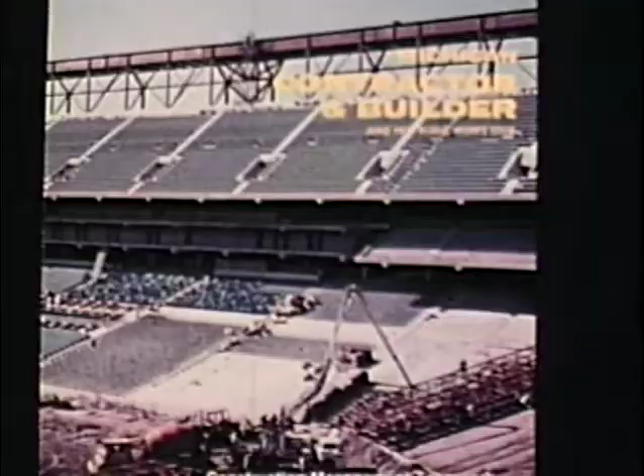Why this widespread interest? Well, all over the country, people had grown used to hearing stories about problems, delays, runaway inflation in stadium construction. For example, the New Orleans Superdome, which was initially supposed to cost $35 million, but wound up costing $168 million. For the Pontiac Silverdome, which has 10,000 more seats, the cost was $55.7 million. This figures out to $691 per seat. Construction time was just a day over 23 months.

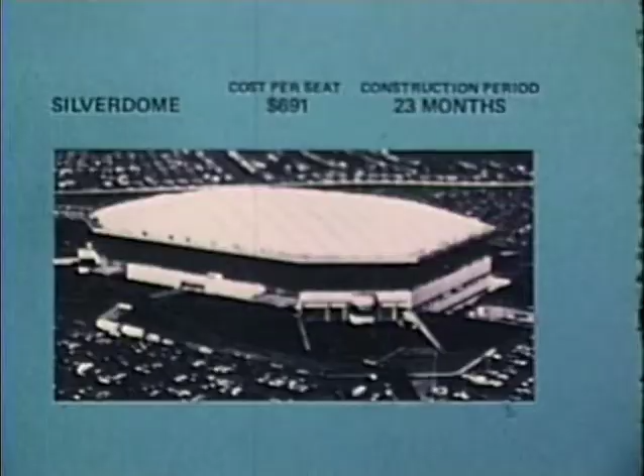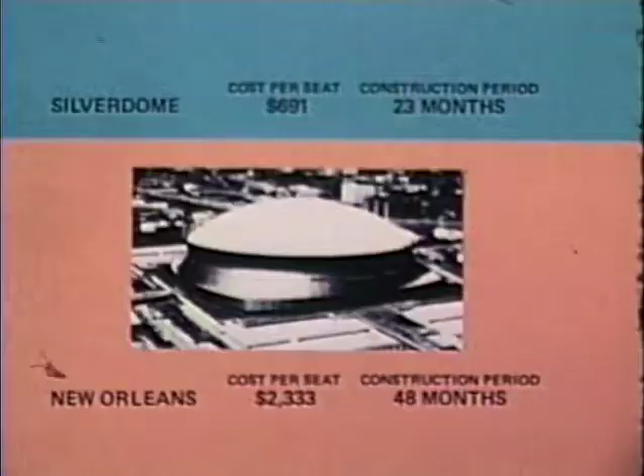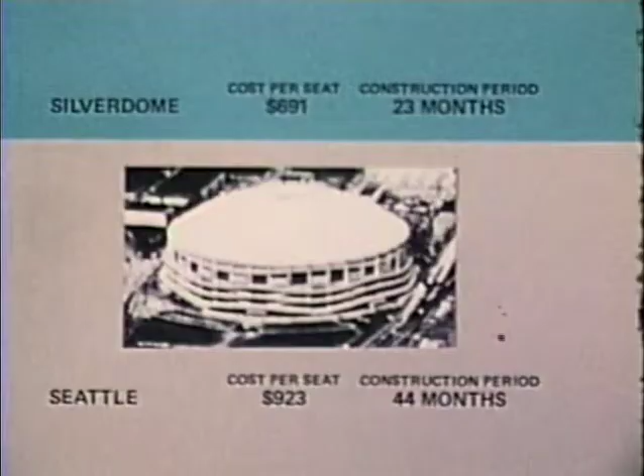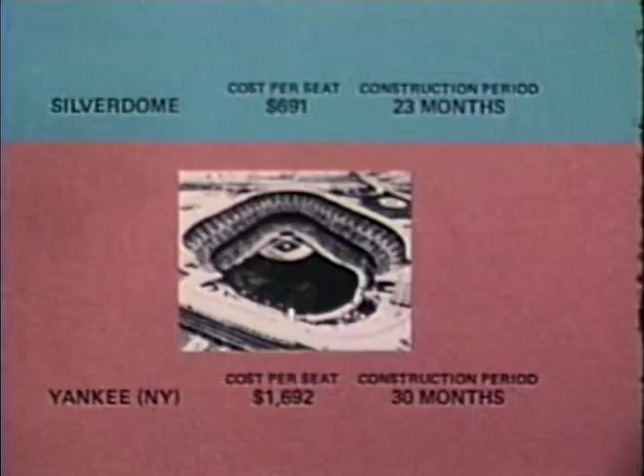In New Orleans, the per seat cost was $2,333. Construction time, 48 months. And here are comparative figures for other stadiums. The Kingdome in Seattle, cost per seat, $923. Construction time, 44 months. The remodeling and modernization of Yankee Stadium in New York. Per seat cost, $1,692. Construction time, 30 months. And the Olympic Stadium in Montreal, $7,902 per seat. Construction time, 51 months.

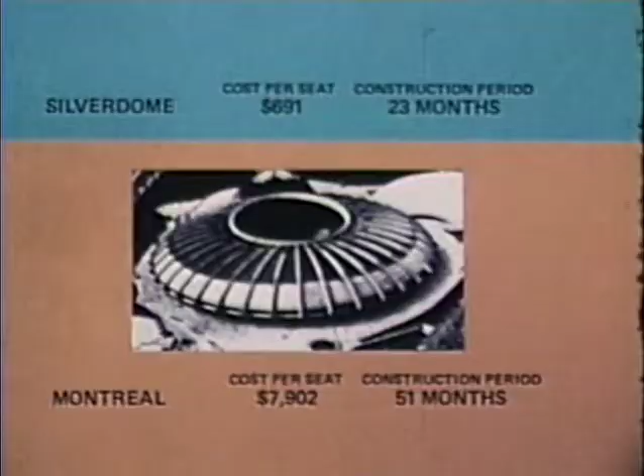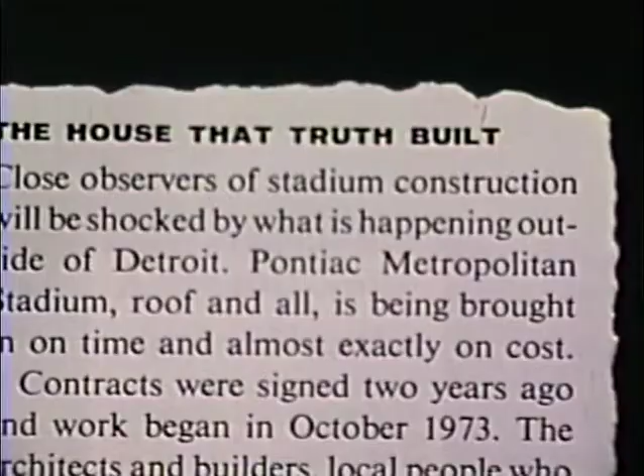The contrast was so great that the magazine Sports Illustrated commented, "Close observers of stadium construction will be shocked by what is happening outside Detroit. Pontiac Metropolitan Stadium, roof and all, is being brought in on time and almost exactly on cost." Comments like these were very gratifying to us at Barton Malow Company. It has been a truly challenging project.

One of the principal reasons we were able to remain on target was the fact that the stadium was built through the method known as construction management, rather than through conventional contracting methods. Under this method, the owner, the architect, and construction manager operate as a team. The construction manager is primarily responsible for cost estimates and cost control, review of design with a view towards value engineering, consultation on construction techniques, coordination of construction and scheduling, and direction of all construction activities.

Ground was broken September 19, 1973 by the mayor of Pontiac, the owner of the Detroit Lions, and the Pontiac Stadium Building Authority chairman. By this time, Barton Malow, as construction manager, had held many meetings with members of the authority, the architect, O'Dell, Hewlett, and Luckenbach. All material, labor, and equipment requirements were thoroughly analyzed. We reviewed the availability of materials and considered possible alternatives to complete the project at minimum cost in the least amount of time.

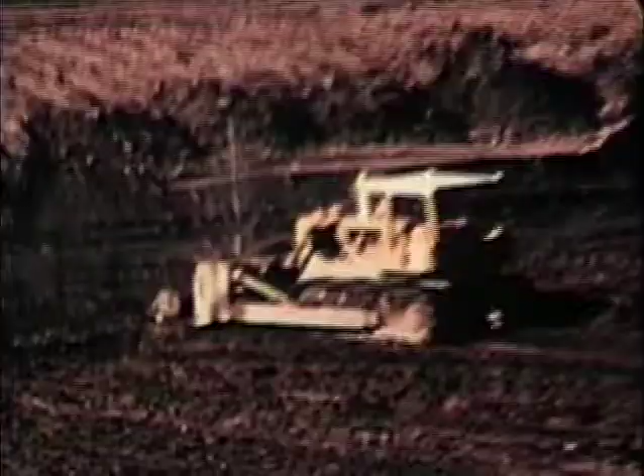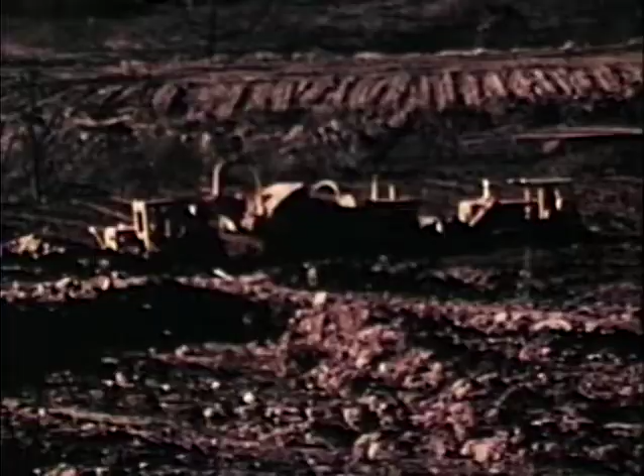The site of 132 acres included several swamps, which had to be drained, compacted, and filled. The grading and clearing required the services of the operating engineers, and they were idled by a labor dispute. It was mid-October when a settlement was reached and the work got underway. Mike Makuta, architect's representative, and Barton Malow Vice President Bill Dryberg, who served as the project manager, recall the problems.

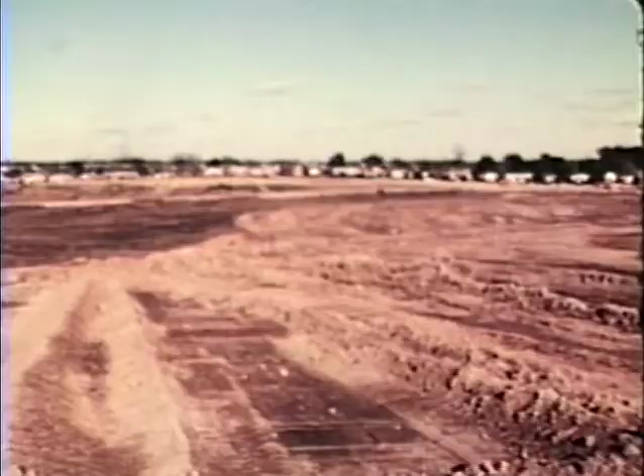Right here behind us, a typical type of terrain that we started in the first stages where we had to cut and fill. Yeah, well, it was like this. Just like this. And worse in some areas. We had 4 swamps to contend with, which we drained and surcharged and allowed to settle for a period of some 12 months. Land balancing involved 1,350,000 cubic yards. Despite the late start, 2/3 of the site preparation was complete by the end of the year.

The original design had called for spread footings to support all columns. In view of the delay and the onset of winter, this would have thrown the project behind schedule. Here is an instance of the flexibility made possible by the use of the construction management method. A very detailed study was made with the structural engineers. As a result, we switched from spread footings to caissons.

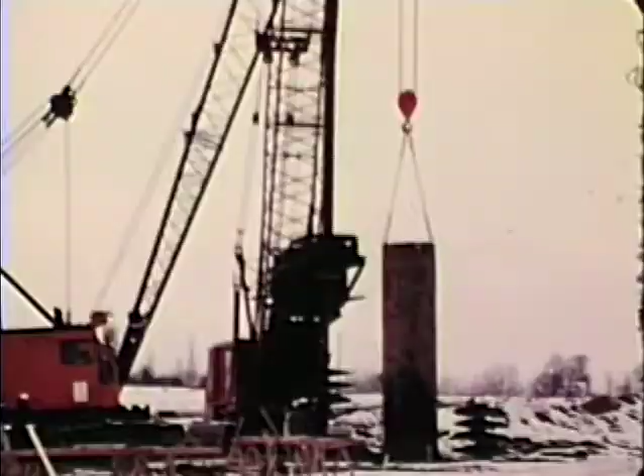We placed 236 of them, from 4 feet to 7.5 feet in diameter, at depths to 80 feet. Shell liners prevented the sides from collapsing in the augered holes. The caissons enabled us to avoid open-cut excavation, forming and backfilling, allowing construction with less concern for winter conditions.

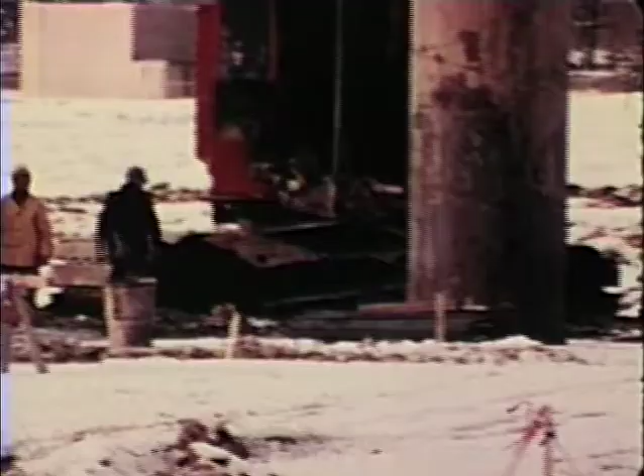Meanwhile, another serious problem had arisen. Here again, the construction management method facilitated a solution. The original stadium structure had been designed in structural steel. During the late summer of 1973, steel costs began to soar. This could have meant at least a $250,000 price increase.

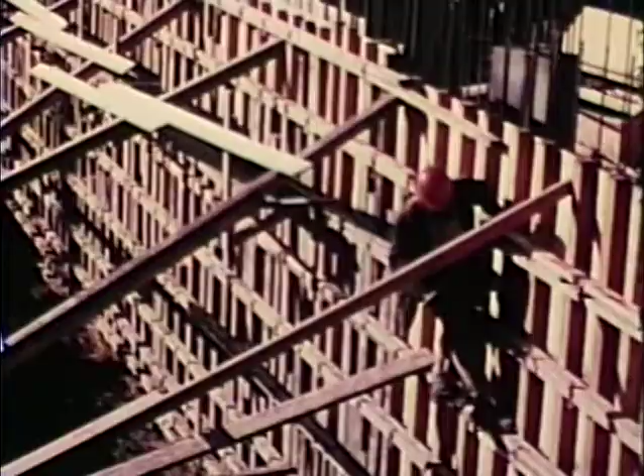A study was quickly launched to see whether or not we could avoid this additional cost by totally redesigning the structure in concrete. It was found by so doing that we could save the $250,000 and also improve the construction schedule. The design changes were made during the winter of 1973 and the early spring of 1974 without interrupting the building schedule. It was another dramatic demonstration of the advantages of the construction management method.

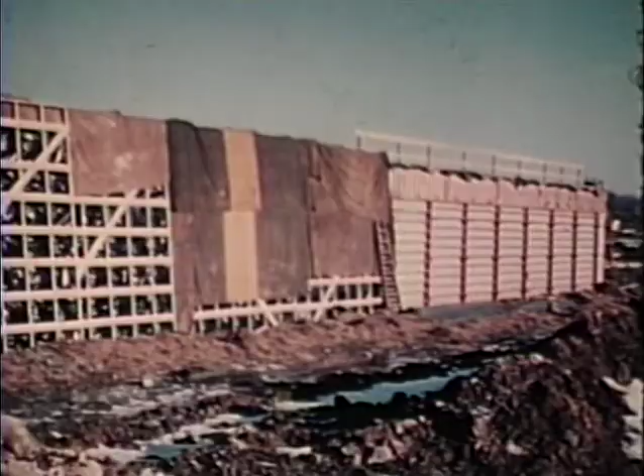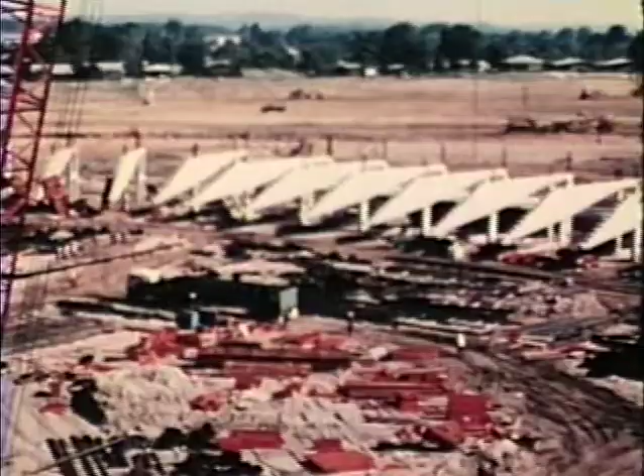By late December of 1973, the pouring of wall footings, walls, and columns was underway. Care was taken to protect them against cold weather. In addition to serving as construction manager, the Barton Malow Company, as general contractor, was awarded the contract for all the concrete work through competitive bidding. As soon as the preliminary work was sufficiently advanced, they proceeded with the lower girders. By June of 1974, they had progressed to the upper girders.

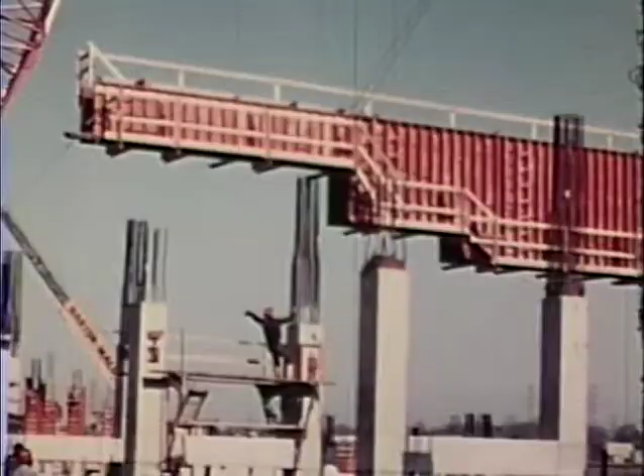All of the girders were poured in place by means of a special self-supporting forming system developed under the direction of Barton Malow Senior Vice President Floyd Wieland, who is seen here discussing the system with Ben Maybach III, Executive Vice President. Here is a lower girder form being set into place.

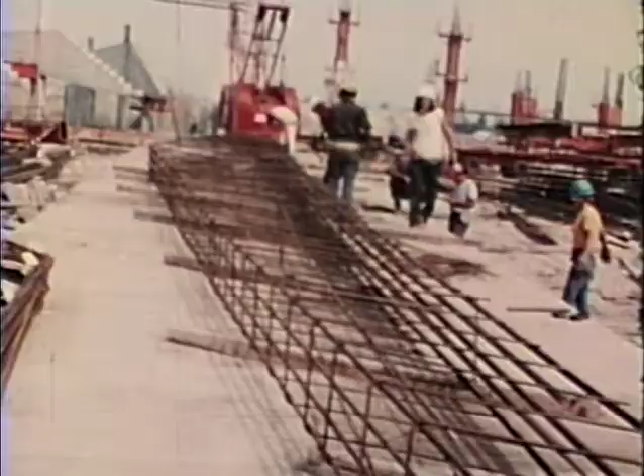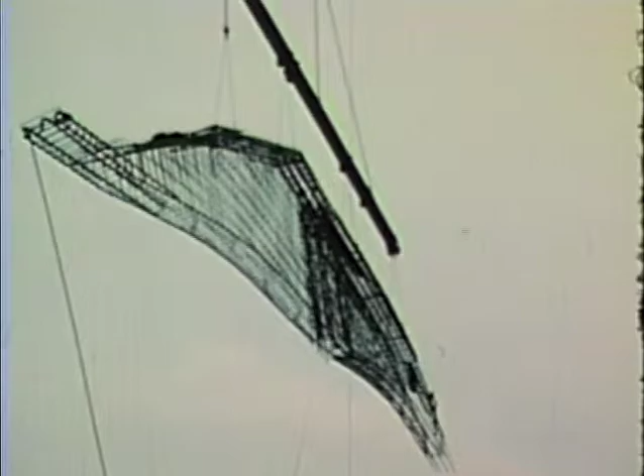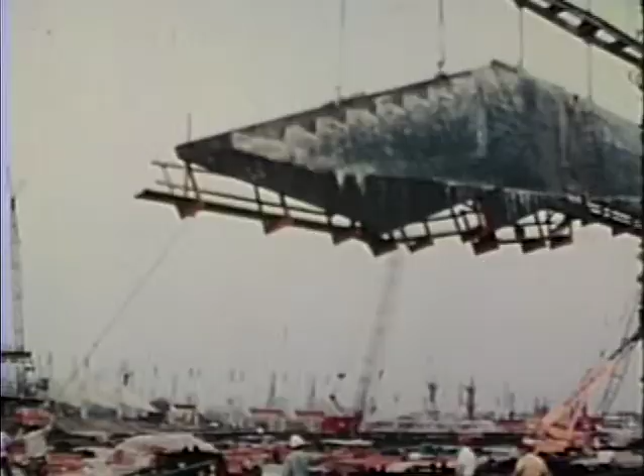Cages of steel reinforcing were assembled, then dropped into the forms. The component form and reinforcing steel weighed 55,000 pounds. Each form was used for 16 pours. There were 3 of the lower type and 4 of the upper. Here we see a lower girder form being removed.

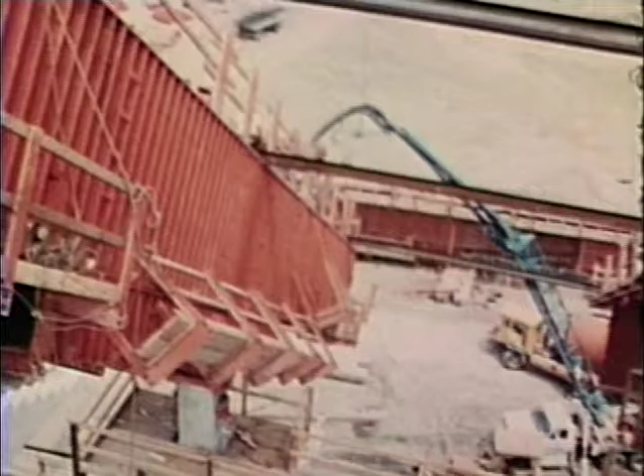Much of the concrete placement was done by pumps, supplied by the Cloverdale Rental Company, a firm closely related to Barton Malow. The use of concrete pumps is rising rapidly. Recent technology has made them capable of operating at almost any height and under most weather conditions. Here, a pump hose is being placed. Of course, not all the concrete was placed by pump. This is an example of concrete placement using the conventional bucket method.

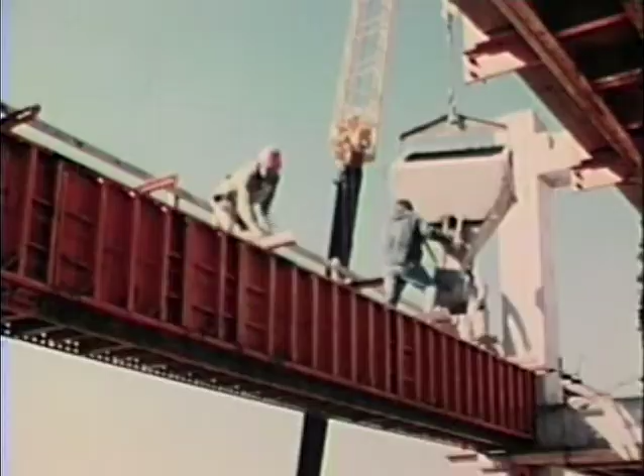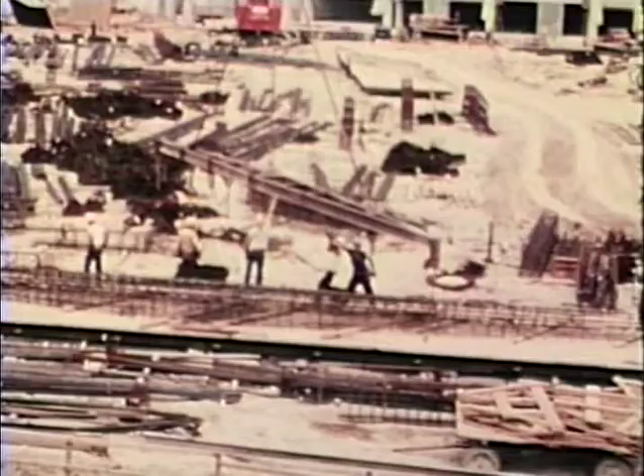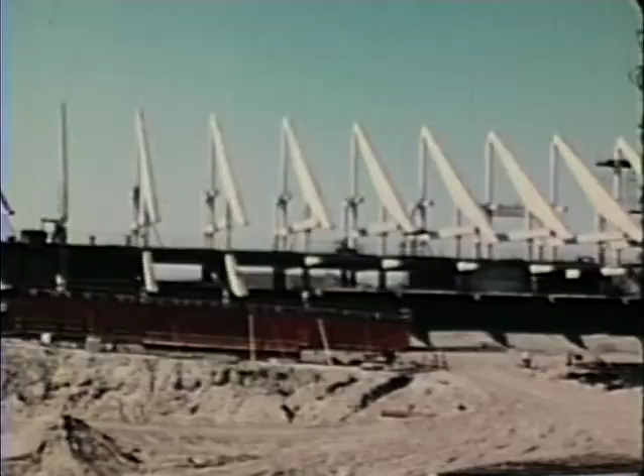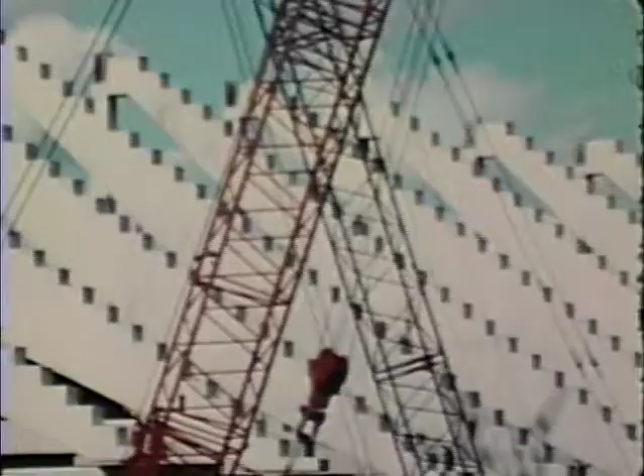The playing field was to be excavated 40 feet below the field level concourse and 50 feet below the parking lot. It was held at 15 feet below the concourse, however, while the concrete work was in progress. This allowed a working platform for the 200-ton crane needed for the handling of the girder forms, and it also provided a logistic storage area for forms and reinforcing steel. With the pouring of more girders, the stadium gradually took shape. 1 year to the day after groundbreaking, it looked like this, representing 11 months of actual construction.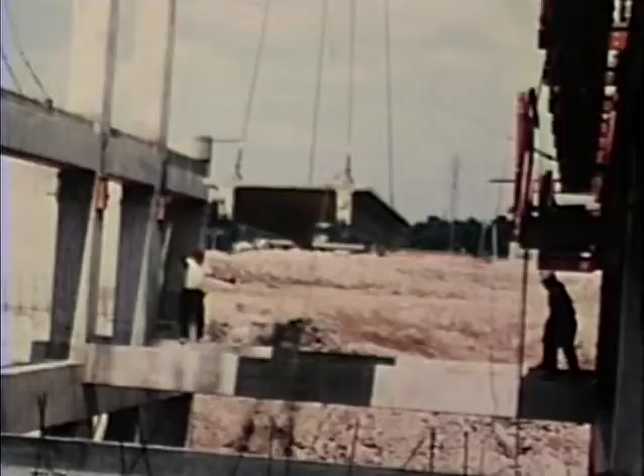As sections of the concrete framing system were completed, installation of precast units was begun. These included 10-foot wide twin T's, 28 feet long. The majority of the stadia sections, each comprising 3 tread and riser units, were erected during the fall and winter months.

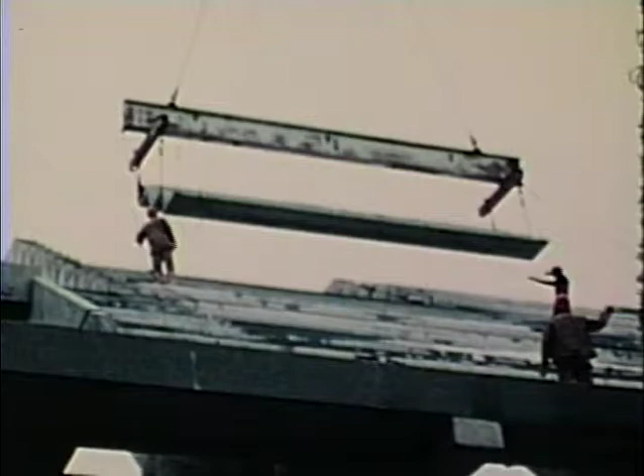Here we encountered another major problem. Right in the middle of the project, the firm manufacturing the precast units ran into financial troubles. This was in the fall of 1974. The firm was put under federal court control. We then arranged to operate the plant for the court-appointed receiver and were able to produce the needed units.

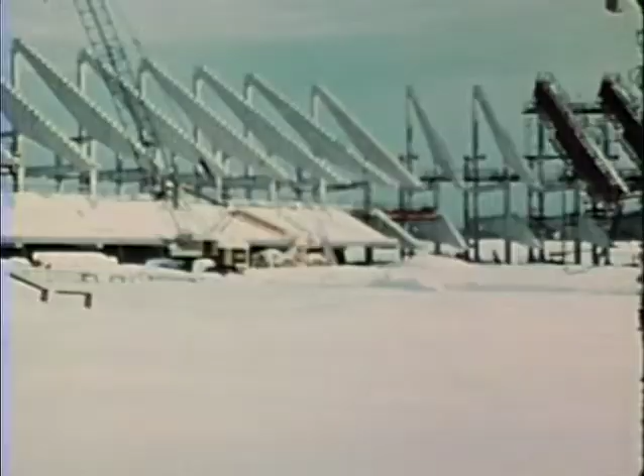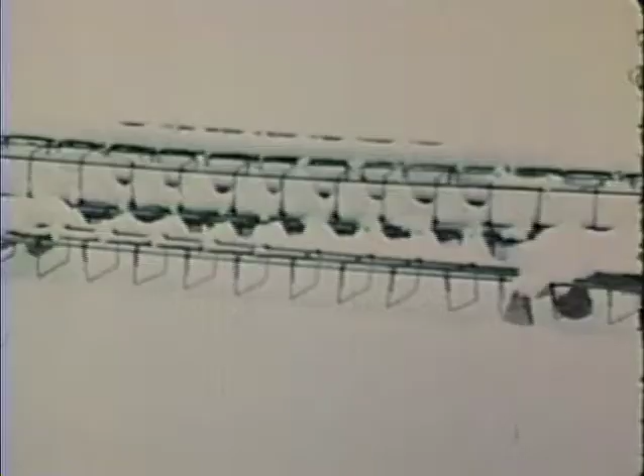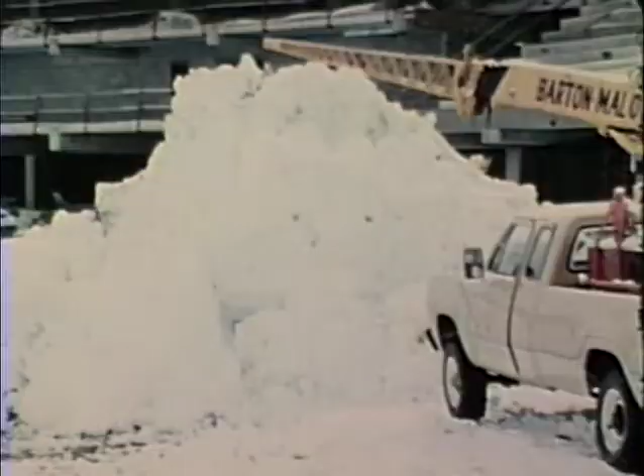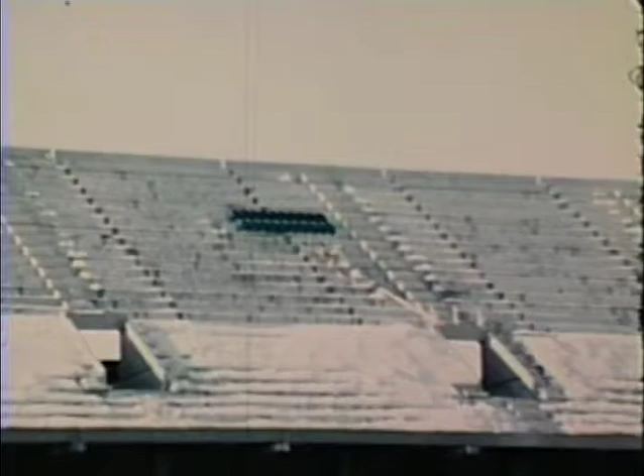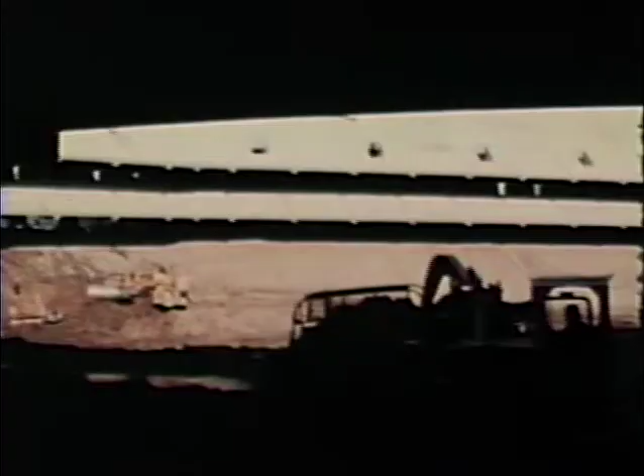With a major portion of the structural concrete and precast work completed, the next step was to excavate the bowl down to the playing field. The excavated earth, some 250,000 cubic yards of it, was used to build berms adjacent to the stadium and to provide inclined ramps up to the club and upper-level seating areas. This is the world's largest dome stadium.

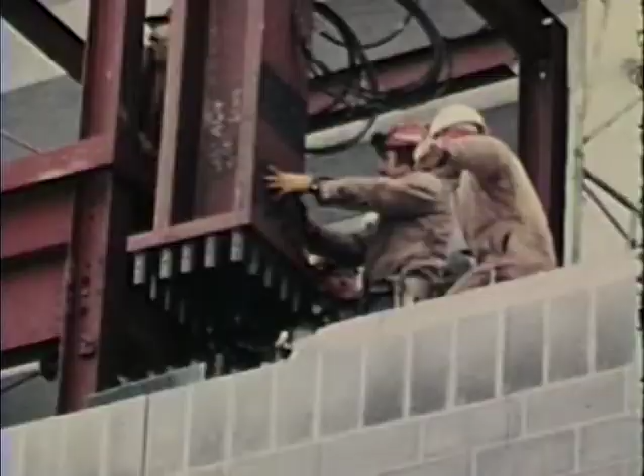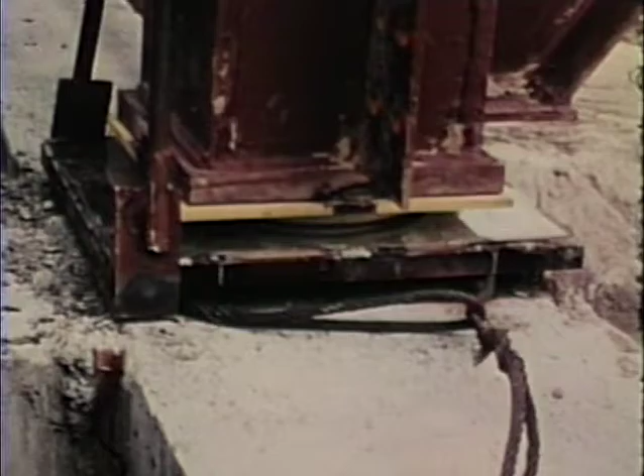In late February of 1975, erection of structural steel got underway for the compression ring, which supports the unique fiberglass fabric roof. The steel was all in place by May 15th, a total of some 1,800 tons. The floating ring, half cantilevered over the outer row of columns, has no expansion or contraction joints. All of the interior columns rest on Teflon wafers to allow movement up to 6 inches in a horizontal plane.

There are 6-foot deep web members on each side of the ring, which has an 11-inch concrete slab cast on a fiber plank permanent form system, with an 18-inch concrete wall on each side. The ring is 23 feet wide and encircles the structure for a length of 2,300 feet. It is 32 feet above the upper row of seats and 105 feet above the parking lot.

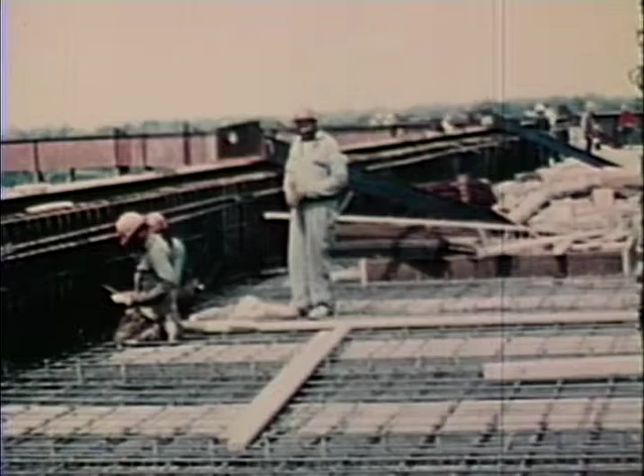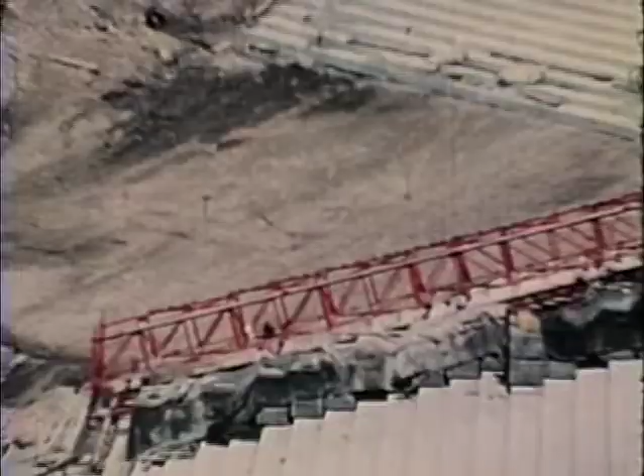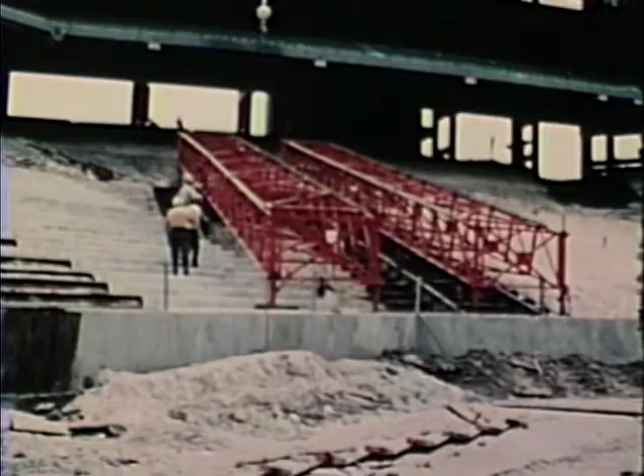Meanwhile, from March through June of 1975, we proceeded with the lower seating sections of the stadium. These sections were poured on grade, and for this purpose we developed a special form system which not only set the grade and the elevation, but also provided the form for each riser for the lower seating section. Insulated metal siding was used for the exterior closure to ensure maintenance of air pressure to support the roof. This had to be completed by September 25th in order to meet our October 2nd date for inflation.

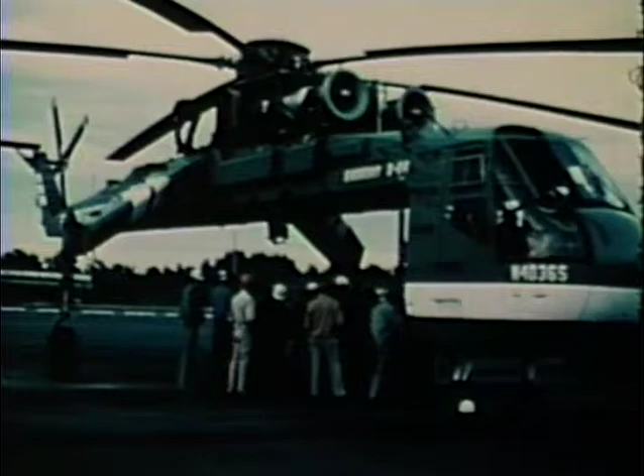The roof is supported on steel cables. It would have taken 3 weeks to string them in the conventional manner. We needed a faster way. Ben Maibach III and architect Carl Luckenbach joined me at the site as we brought in the largest helicopter available, an S-64 Sikorsky with an FAA rating of 20,000 pounds of lifting capacity. The cables are of galvanized steel, 3 inches in diameter. They range from 550 to 750 feet in length and weigh up to 16,000 pounds each.

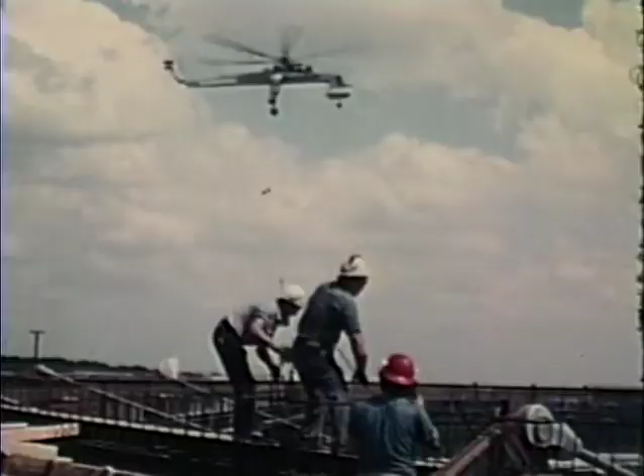The big helicopter picked them up from the parking lot, carried them over to the stadium, and lowered them into place. High winds hampered the operation at first. We immediately closed it down because safety is always our #1 consideration. We brought into service a second power winch so that both cable ends were under constant restraint. The cables are secured by open strand sockets at each end to the tiebacks on the compression ring. Each clevis weighs 300 pounds. The pins each weigh 96 pounds.

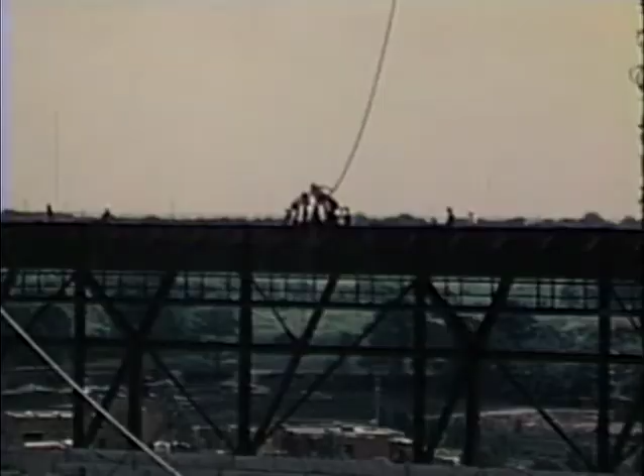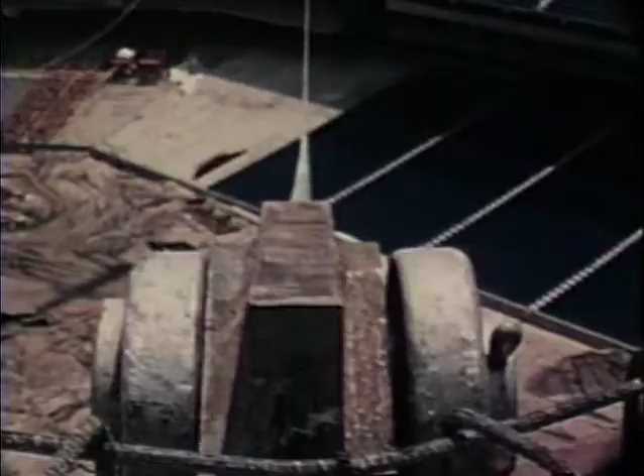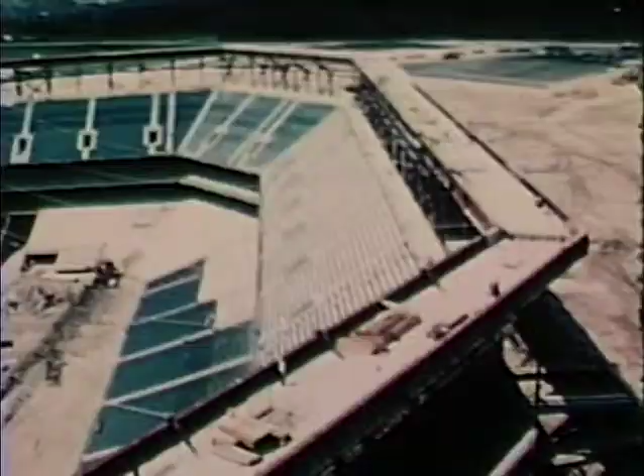The total length of the cables is about 2 1/3 miles, and they weigh 125 tons. The whole mix of cables and fabric weighs 200 tons. A conventional roofing system of equal size would weigh 30 times as much, or about 6,000 tons. The entire job of placing the cables was completed in one weekend, a total of 11 hours flying time on June 14th and 15th, 1975.

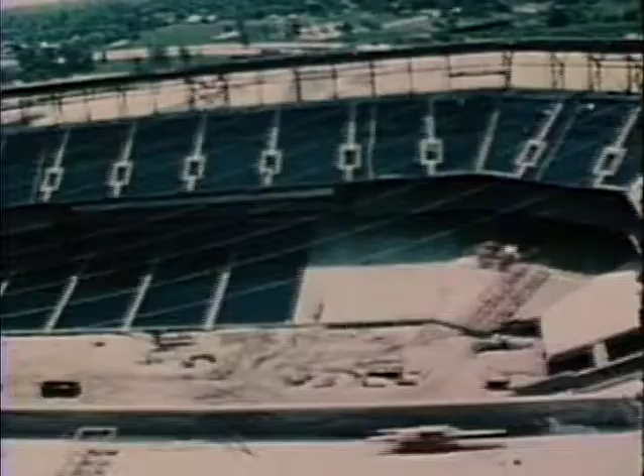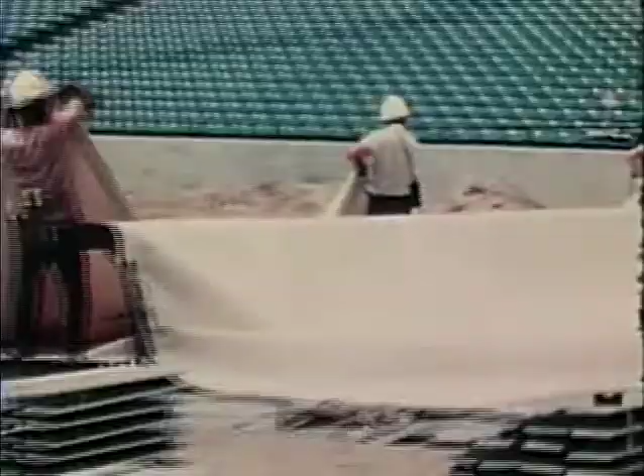The installation of the roof fabric was carried on from July 1 through October 1, 1975, as the contractor strove to meet an inflation date of October 2nd, 9 months ahead of contract schedule. The fabric is 1/32 inch thick Teflon-coated fiberglass. Initially tan in color, it gradually bleaches to a gleaming translucent white. Its area is about 400,000 square feet, nearly 10 acres. The 100 panels were installed in the air, working from suspended work platforms, using a crane and 4 A-frame towers to pick up and roll out the fabric panels.

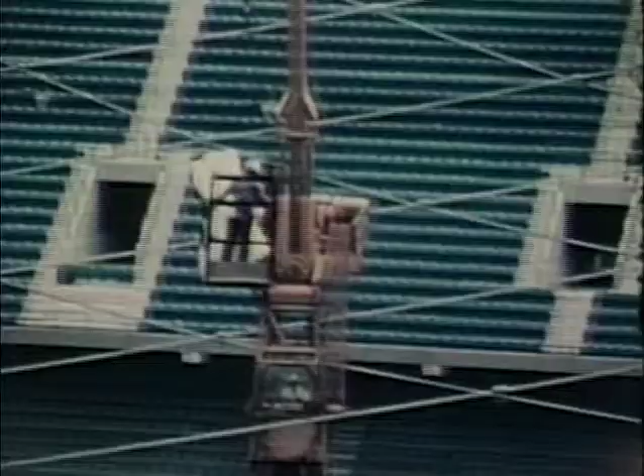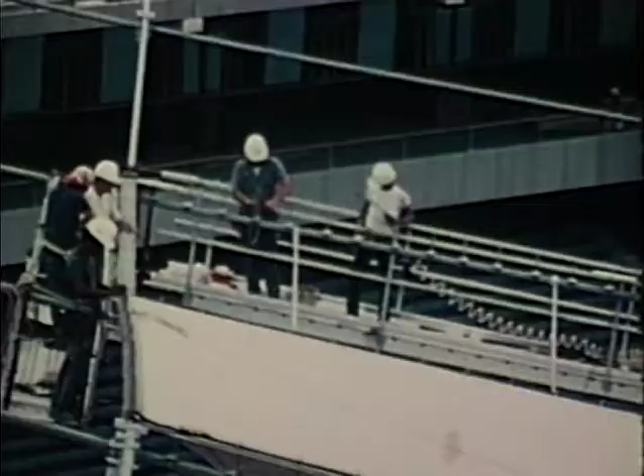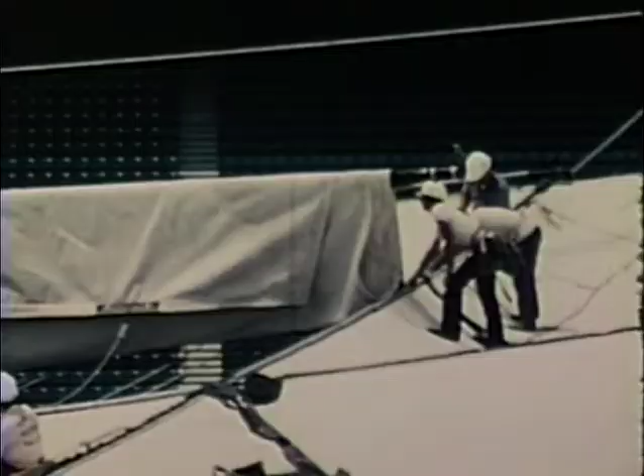The roof weighs slightly less than 1 pound per square foot and is air supported at 3 to 5 pounds per square foot. In maximum snow load conditions, it may take 12 pounds per square foot to support it. The surface of the roof panels is extremely smooth due to the Teflon coating. This gives the material a self-cleaning action with every rain. Under tension, the fiberglass yarn is pound for pound stronger than steel and less expensive. It also resists burning, shrinking, rotting, or mildewing. Estimates of how long the roof will last range from 25 to 50 years.

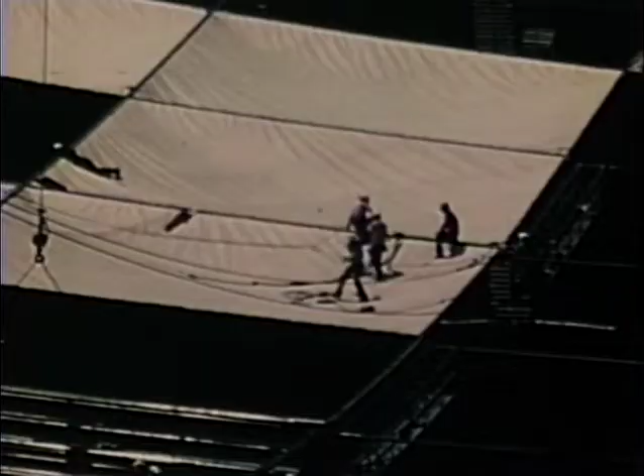This system has been used to cover other structures, notably the U.S. Pavilion at the 1970 World's Fair in Osaka, Japan, but never on so large a scale as the Silverdome. Wide use of the system is expected in the future for many types of structures. The supporting pressure is applied by 25 blowers, each powered with a 75 horsepower motor mounted on the roof ring. These also were lifted into place by helicopter.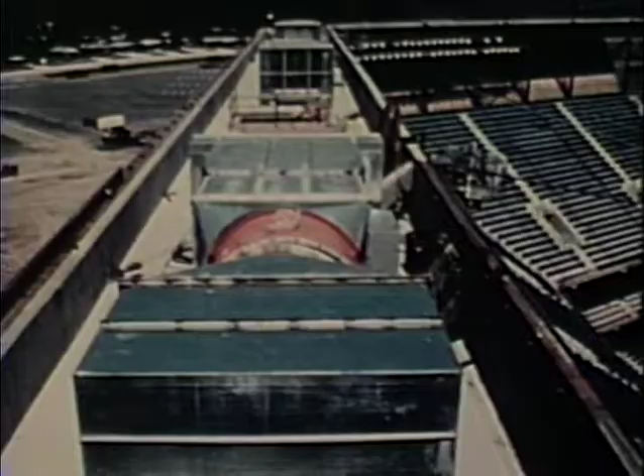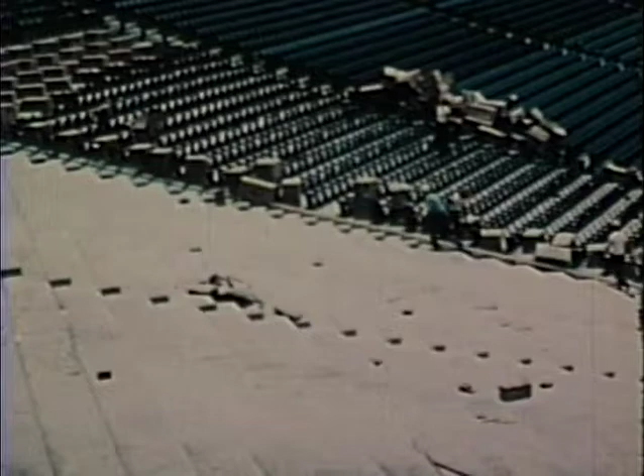Heat is provided by 10 of the blowers and 4 indirect gas-fired units. The number in use at any one time depends on the outside temperature, wind and snow conditions, and the kind of event scheduled. When the stadium is not in use, 4 or 5 of the blowers are enough to keep the roof inflated. While the roof work was proceeding, so was the installation of the seats. The schedule called for 10,000 a month, but the installers managed to reach a rate of 16,000 a month.

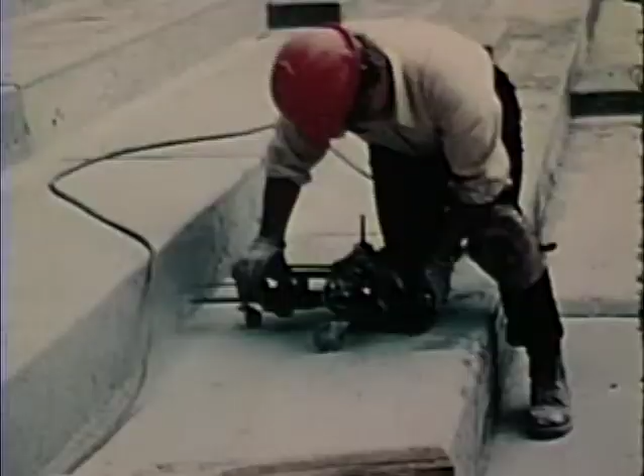The 80,600 theater-type seats provide much more space per spectator than the old-style benches. If bench seating had been used, as at the University of Michigan Stadium and the Rose Bowl, the Silverdome would seat in excess of 120,000. Installation of the seats required the drilling of holes for about 175,000 anchor bolts.

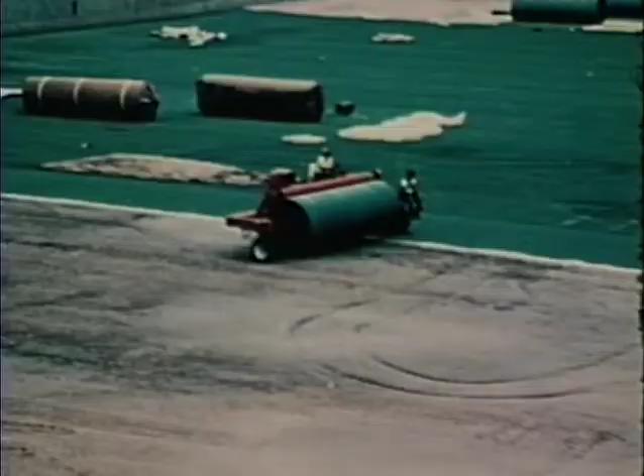With the first preseason football game scheduled for August 23rd, it was now time to install the AstroTurf to cover the playing field. A special machine was used to handle and lay each roll. There are a total of 28 rolls, each 15 feet wide by 234 feet long and weighing 3,600 pounds. A continuous nylon zipper joins the rolls together to form a total covering.

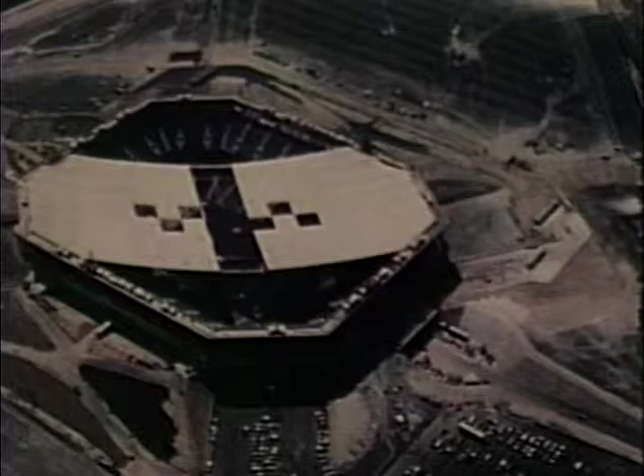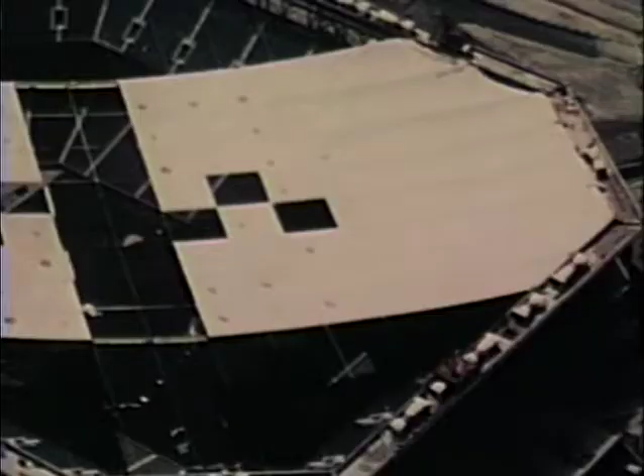Because of the early completion of the stadium, the Lions were able to schedule a preseason game as early as August 23rd. Heavy rains delayed the building cleanup and asphalt paving of the parking lot. With the roof only partially installed, the playing field got so wet it could not be striped. We brought in a couple of helicopters to fan it dry. The stadium was ready for its first football crowd.

Fans streamed through the gates, gasped in admiration of the stadium, enjoyed the pregame entertainment, and cheered the Lions. To make it a perfect afternoon, the Lions won the ball game.

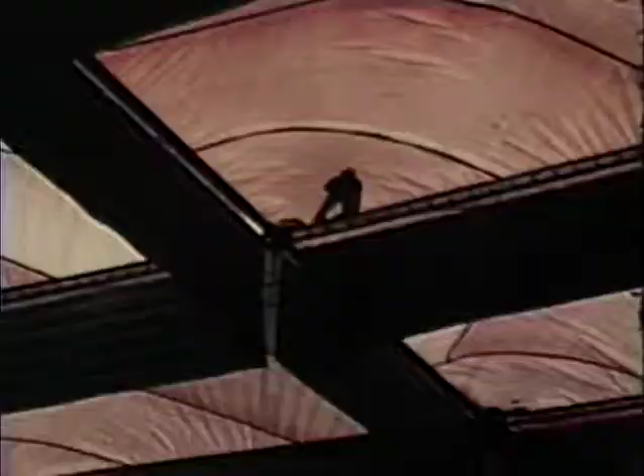On October 2nd, the stadium got its finishing touch. The big roof was inflated. It was a gala occasion as hundreds of guests, including VIPs from all over the world, gathered to watch the climactic event. There had been more heavy rains. The roof fabric held a number of large pockets of water. The crowd watched in suspense. Would the blowers be able to generate enough pressure to lift the dome?

The suspense didn't last very long. Excess water was pumped out and the big top inched upward. As it made its final surge, the crowd burst into a rousing cheer.

The stadium, including its private boxes, spacious press facilities, and 112 acres of paved parking, was now ready, not only for football, but for an infinite future of stirring athletic, entertainment, and cultural events, such as the record-breaking Revival Crusade conducted by evangelist Billy Graham, which had a total attendance of 365,000 people, including 70,000 at a single service.

And record crowds also for popular entertainers such as Elvis Presley. The Silverdome also provides an unmatched facility for community events, such as a gigantic Scout-tacular, at which boys and girls demonstrated the skills and learning they've acquired through scouting.

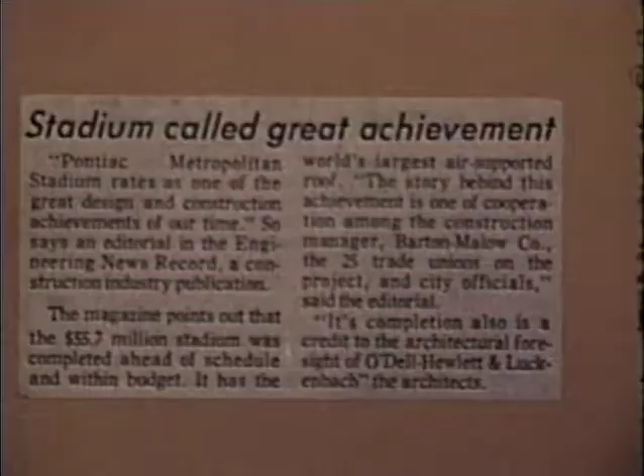For the citizens of Pontiac and the rest of the metropolitan area, the completion of the Silverdome was an occasion of great civic pride. For us at Barton Malow, also, it was a memorable moment. Building the stadium has been more than a job to us. It has been an adventure we will never forget.

Our original contract called for 800 days from start of construction to beneficial occupancy. The first game was played 670 days after construction began, 130 days ahead of contract schedule. The original contract for the roof installation called for the roof to be completed by June 30th, 1976. It was in place and inflated 9 months earlier than that, October 2nd, 1975.

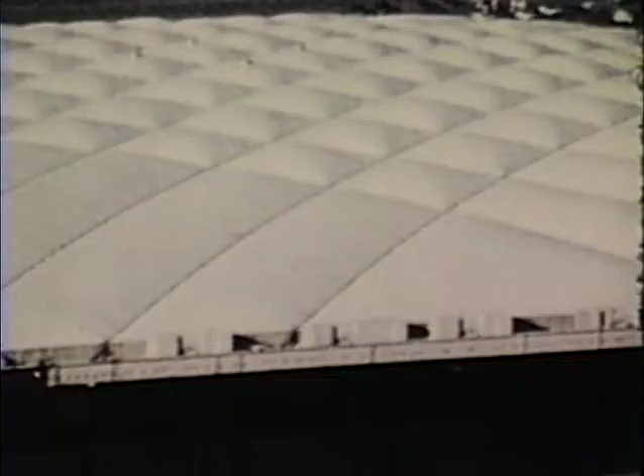The overall compression of the construction schedule reflected substantial dollar savings for the project, since all of the work was able to be performed within the framework of existing labor contracts. A total of 2,536 union construction tradesmen, representing 17 different trades under the leadership of the Greater Detroit Building Trades Council, completed the entire project without any work interruptions.

Cooperation of the owner and the architect engineers had been exceptional. We feel it has been the best test yet of the construction management method. In my 20 years of experience as an architect, I have to say that this has been the most gratifying and probably one of the best team efforts ever achieving a structure of this kind and of this magnitude.

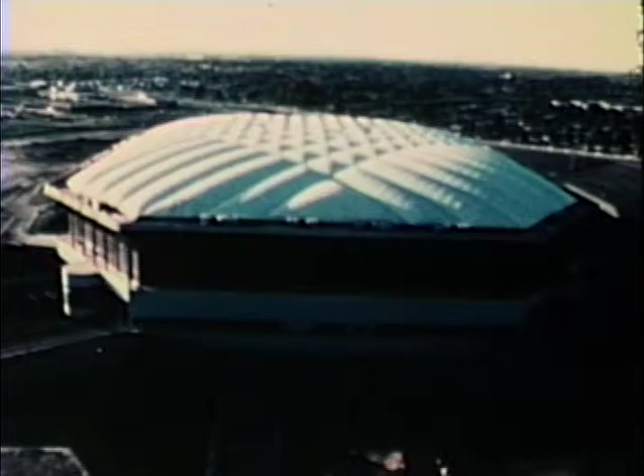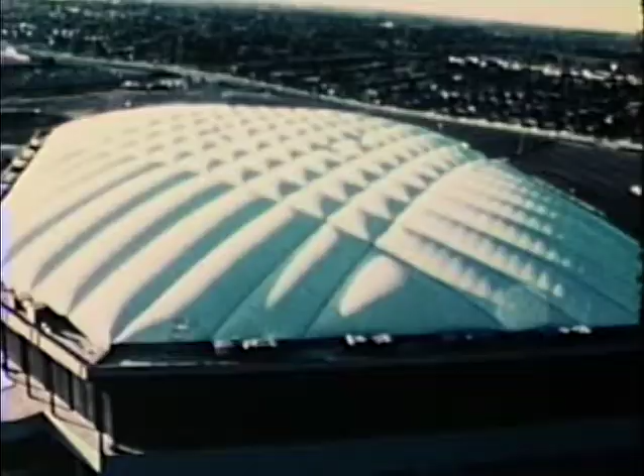During the construction period, the industry as a whole had experienced some of the greatest inflationary increases in material prices of the last decade. Yet the construction management team had been able to cope with the inflationary spiral by the accomplishment of alternative design and the substitution of materials without sacrificing quality, while also maintaining cost control within the original budget.

Finally, and most satisfying of all, was the simple fact that in the face of many difficulties, we had been able to attain the goal that we hold before us in every project: to finish it on time, within budget.